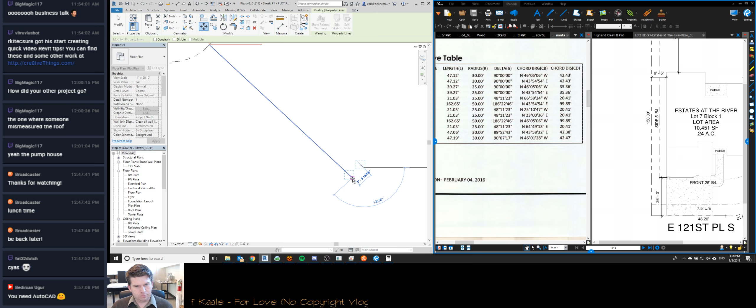No, AutoCAD is the last thing I need. That's what was missing right there.

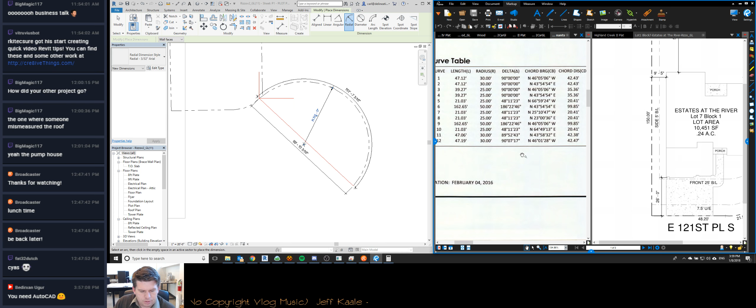So the question is, one of these is incorrect. Either the chord distance or the length is incorrect.

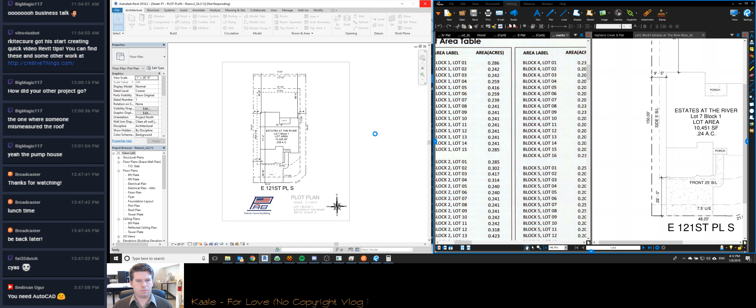So I just saw. I actually show the acres correctly. We just had it wrong before. Okay. And it's taking forever to open and save.

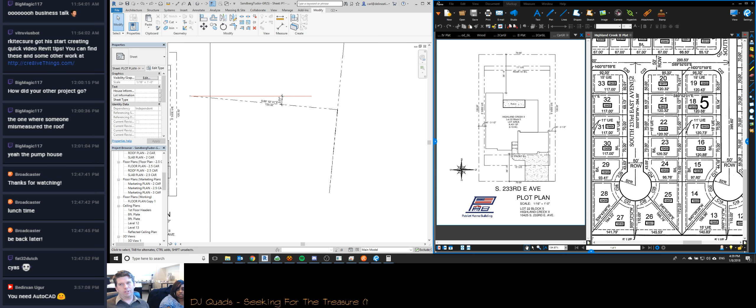Oh, you know. So there were a couple things that I wanted to go over that I noticed that you, I don't want to use the word struggling with, but some concepts that I felt you weren't quite grasping with view templates when we were doing the custom modifications. And then I want to go over the project versus True North. Okay. Mostly because what I found is, no offense, but I have to check. So, yeah. And in checking your work, it's hard for me to go in and draw these lines at these coordinates because True North is rotated. So I'm drawing them in at the coordinates, and then it's rotated not quite the way I expected it to.

So hopefully in the next 30 minutes, I'm going to kind of go over those couple things, and then what I want you to do is I want you to kind of go do an hour of, okay, let's see if we can grasp these concepts and do a couple things on a project or make up a project or something and see if you can reinforce what I'm going to show you, because I know when I sit over here and I'm the one clicking and typing and stuff like that, it's hard to actually reinforce it. So when I get done with this, I want you to go back and kind of just see if you can reinforce what I'm going over.

Okay. So the first thing I want to go over are view templates and how I use them and how I feel that they should be implemented in Revit. Not everybody uses them the same way, and how that affects the visibility graphics of one view versus many views. Okay, so one thing that I've noticed is that, especially, and I noticed it mostly in the design option projects, we have view templates that are assigned to views, and then we have view templates that we use to modify the visibility graphics of views. Okay, and what I noticed is that instead of using the view template to modify views, you're assigning it to a view or you're changing a view template, and what happens is that has a trickle-down effect on all the views in the project. So I want to give you a quick example.

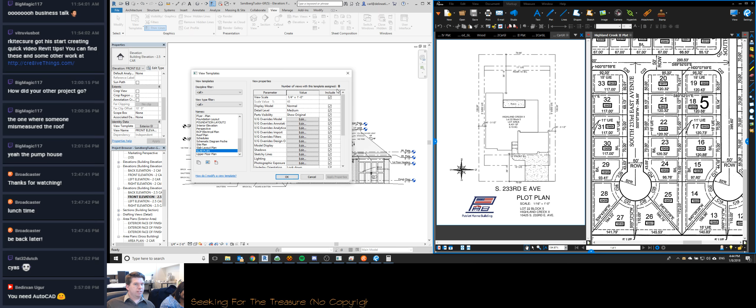So another good example, let's just go look at that site plan. So there's only one view with that assigned to it, and slab layout plan, there's 3 views, probably 2, 2.5, and 3 car. Garage slab plan, there's none assigned to that one. Okay, so if it has a view template assigned to it, just know that when you're in this dialog box changing things, it changes everything for all the views that that's assigned to.

Okay, now what we have set up is, I'm trying to think of a sheet where we just, okay, so for instance, the area plans. There's not a whole lot that we document in the area plans, so instead of making other views, it's quicker to just change the design option.

Okay, so one of the things that you can do using view templates is, and it's kind of weird with the terminology. If I select this, I can see that area analysis is the view template that is assigned to this view. However, if I go into this, and you know what these checkboxes mean, right? If I come down here to design options, it should be unchecked, but it's not. So I'm going to uncheck that for now, and hit OK.

Now I unchecked that, so which views did that affect? It affected all of the ones that view template is assigned to. So if I come to this one and go to area analysis, I can see that that's unchecked there. So I'm going to check it here, and then I'm going to come to this one, and it's checked. So that affects everything.

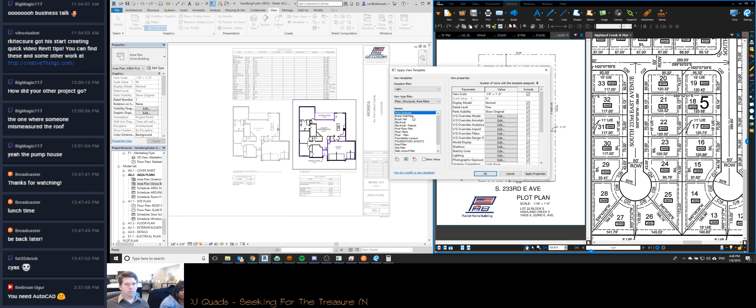All right, so the difference between assigning a view template and applying view template properties is that when I apply template properties to this, I'm only applying it to this one view. So it's not going to mess with the other views that the template is assigned to. I would have to go and do it to that one also.

And the same thing with schedules. I've seen this in some of your schedules too, where if you go into the properties, see this has a view template 3 car assigned to it. We don't want view templates assigned to schedules. But you can go in and let's say this schedule, area schedule here. I think that's the right one.

We can assign template properties 2.5 car. Oh no. 3 car. That should be, oh, it's not going to update it because we actually have to move this line. That's right. Oh, it's this one right here. So room finish schedule.

Go here. No view templates assigned. That's fine. So if I come here, apply template properties. Let's go 2.5 car. So that'll change to 2.5 car. Okay. I didn't change the view template. I just changed that property that I can update.

Now, in the view template itself, if this has a checkbox next to it, then when I apply view template properties, it won't change it if there's a checkbox in the view template that is assigned to the view. So essentially what we're doing here is if we have a view that has all these checkboxes, let's say that this is an area analysis view. I don't know if you can see that or not.

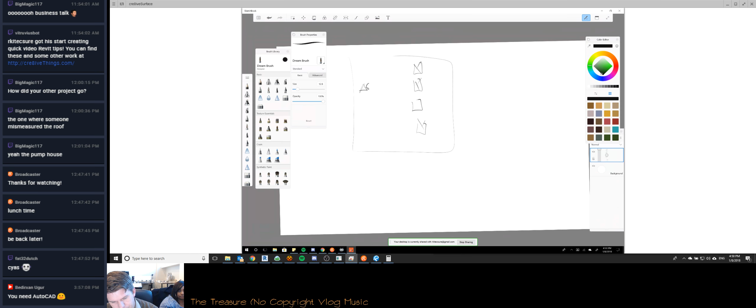Let's say this is area analysis. And we've got this view template that has all these properties that are locked in place with those check marks. If we come in and we say apply view template properties, what it's going to do is it's going to check to see which checkboxes in this view template are checked. I want to make sure I match the right number of boxes.

So if we come and we apply view template properties here, and we'll make this one red. No, we won't. There we go. The only ones that it's going to actually fill are the ones that are empty. So this is the only one that gets this property here. Everything else is already full, so we can't put anything in it. It's basically locking it, pinning it, making sure you can't change it.

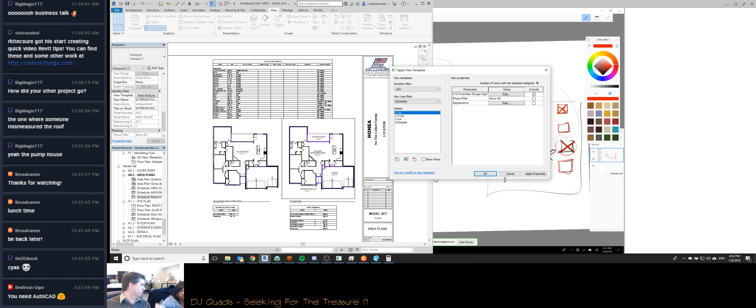So this is open, so the only thing that's going to come in when we do that assign or apply template properties is the VG overrides design options box, because it's checked. That's the only thing that's going to be able to come in if it's empty in the other one. So we're basically filling those gaps. Makes sense? Yeah, makes sense.

And then to confuse things even more, that's not to be confused with, see, if I'm just in visibility graphics, this is all grayed out. Why? Because nothing is selected, or is it? I'm in the view. Because it's none. It's not a template to apply to it, right? Opposite. I can't change anything because it's locked by the view template.

So if I go look at the view template for this, VG overrides model is checked, which means that everything that's set in the view template, I cannot change in the VG overrides model dialog box here. And that's the same for everything here because it's all checked. See, even the design options is checked.

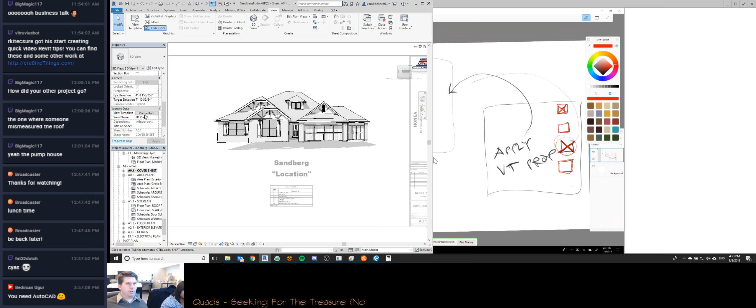So just to reinforce that real quick, I'm going to come here to perspectives. I'm going to uncheck VG overrides design options, visibility graphics. Uncheck that. Hit OK. And now I'm going to go to visibility graphics in this view. And now you can see that I can change that. It was locked before, but now it's open. Any questions about visibility graphics, view templates, applying view?

So the view templates that you apply, say it's locked, and you can go into the actual view, and you can uncheck it. Will that just apply to that one, or is it gonna change anything? Good question. So think about the context of what the command is. If I right click this and I say apply view templates, what am I applying view template properties to? Would it be the 3D view? Yeah, just that one view.

Now think about going into view templates, manage view templates, and then editing one of these view templates. What am I applying a change to here? Is it gonna be all of them? Yeah, because I'm changing the view template. So we've got the view template. It goes out to all these different views.

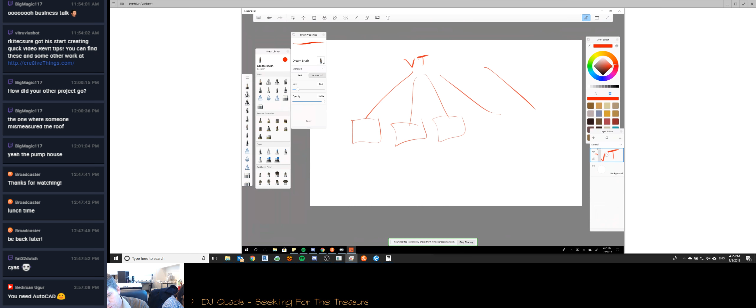So if I change a setting in the view template, what it's going to do is it's going to go change it in all the views that that view template is assigned to, so that they match.

Now let's say in these views, we have a property that is not set in the view template. It's unchecked in the view template. So in Revit, it's unchecked. That'll be what's blue here. That means that I can go to this view and I can change it to something completely else, because it's unchecked. And then I can go to this view and I can change it to something completely different.

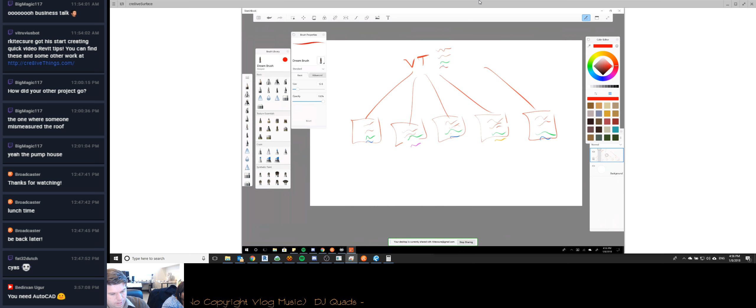I can even go into the view template and I can change it here, but if it's unchecked, it's not going to change anything in these other views. Now the second that I go in and I check that, that's when Revit goes, oh, okay, and it makes that change in all the views. Does that make sense? Yeah, it makes sense.

All right. Hey, we're doing good. That was only like 10 minutes.

Okay. So regarding true versus project orientation. Okay. So what is your understanding of, what am I trying to say? Project orientation, Project North versus True North. What's your understanding of that?

My understanding is when you're in Revit, when you apply the True North, then it's going to be rotated, or it's going to be the actual site. But if you put it to, what's the other one? Project North, yeah. Wait, maybe that's the opposite. Well, just keep going. Keep going through your thought process, and then we'll correct it.

Project North is the actual. I mean, it's gonna be 90 degrees or however you see it in Revit. Right. Okay. You're correct. So what happens is inevitably, the world is round, and like Tulsa downtown's on a grid, right? So everything in downtown Tulsa, all the properties look like this, right? Or something like this, right?

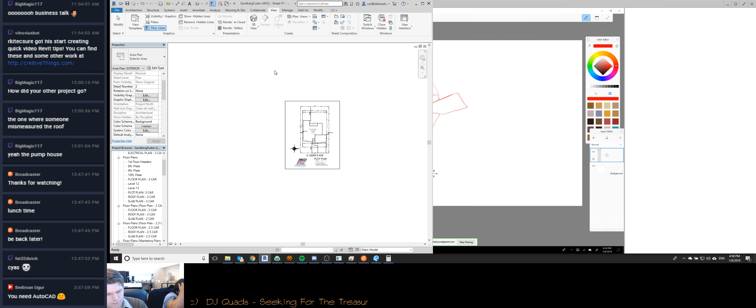So what happens is you get something like this that you're trying to fit on a sheet like this, and because it's rotated, it doesn't fit. But as soon as you rotate it to be orthogonal to the sheet, it works, okay? So let's say that your True North, okay, you've got some properties that look like this, right?

True North is this way because that's magnetic north. Well, in our case, it's going to be the way that the compass needle points is north, okay? Because we live in Tulsa and not the North Pole, we don't have to worry about what magnetic north actually is for the purposes of this, okay? So let's say we want to put this property right here on a sheet like this. I'm going to go ahead and make 2 sheets, all right?

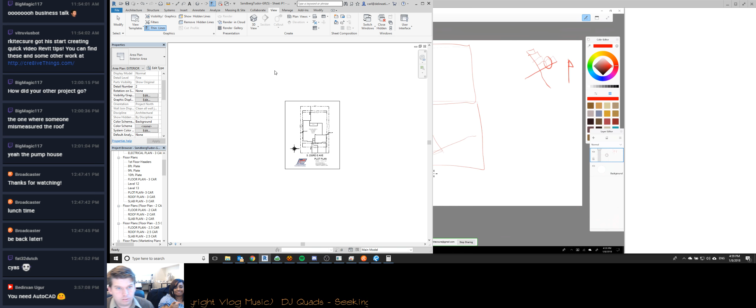So if we wanted to do a proper site plan, we could do something like this. Yes, sorry. Okay, we could do something like this. Okay, to clean it up, we could rotate that just a little bit so that it's this. And True North is this way on this one. Okay, but what happens is that True North starts pointing that way. Okay, this would be True North, and this would be Project North.

For our Patriot home building projects, all of our Project North has the entrance on the south, plan south. Okay, so in this case, this is plan north, plan south, plan east, plan west. And this is a good system to use if you're talking to somebody about a project that's rotated. If it's rotated extreme, where you start talking about it and it's like the north side of the project, and somebody's like, oh, time out, north what?

Right? Because you're looking at the top of the plan, but north might actually be like somewhere over here. Because it's a long project, and then we had to rotate it to fit on the sheet or something. So you can say plan north, plan south. Now, if you're looking at the site plan and you're talking about civil components, there's a tree on the northeast of the project. That's when you want to start using the True North orientation stuff.

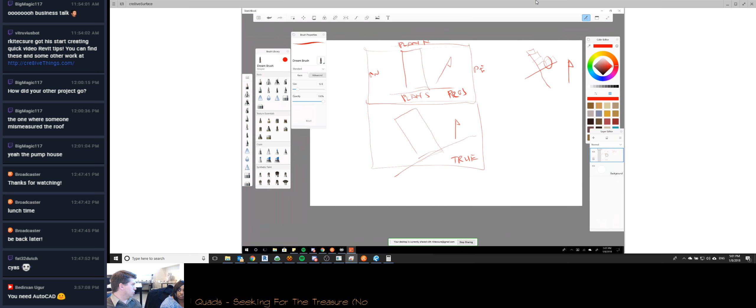Okay, so with that in mind, the easiest way to reproduce these Patriot home building projects is to make sure that south is always down. Especially in project orientation. And I think what I'm experiencing here is a product of the way I showed you how to do these. I showed you how to do True North and then rotate and all that stuff.

And I think the easiest way to do this is going to be to leave True and Project North just straight up and down, and go in and sketch the property lines and then rotate them to be parallel with the house. I think that's going to be the easiest way to do it. Now with a custom home, it's a little bit different because we don't have to worry about reproducing it over and over again.

So what I want to show you real quick is how to recenter this project so that when we sketch future property lines, it comes in at 0 is straight across and 90 is straight up and down. Okay. All right. So what we're going to do real quick is under massing and site. Knew it was in there somewhere. Nope. Manage. All right. So I want to be sure I'm in project north. Undo. Okay.

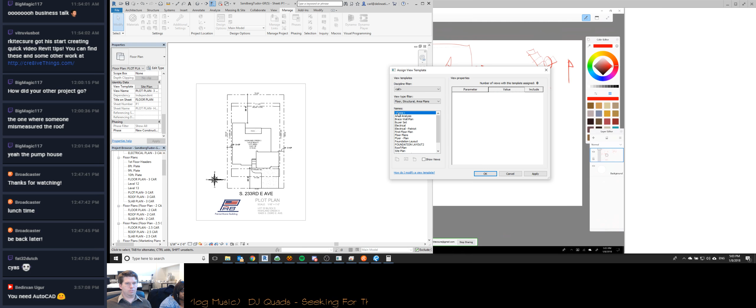So we're not in a view template, so I can set this to, and actually I'm going to go ahead and set true north. So we had rotated true north maybe from a previous project or something, I'm not sure. But I want to go ahead and rotate true north, and I want this to be straight up and down. Right. So we're good with that. And then we're going to make this project north.

Right, it looks like it's already. Project north is a little bit more limited because you can only rotate it in 90 degree or 180 degree increments, or you just select the line and it says, well, this is the one that I want to be north south.

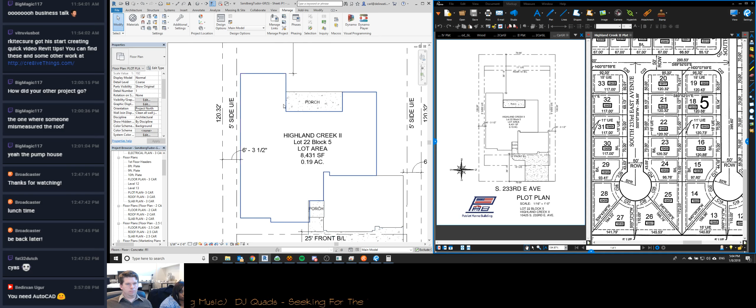It looked like it did have to rotate a couple things there. So what I can do now is I can double check and come in and enter these distances.

We're just going to say 120.32. We're going to say that's north. Have you figured out these coordinate systems yet? Not really.

They can be a little complicated. Takes some time because you see me sitting here trying to figure out which way I'm going. Takes a little bit. So this one's going to be going 70 south. Is that right?

Well, let's find out. 0759 east. That doesn't seem right, but we'll see what happens. 120.32. 120.32, gonna be south. 89.5203 west.

Insert 70, north. 0759 west. I don't think this is completely going to work out the way I want it to. Yeah.

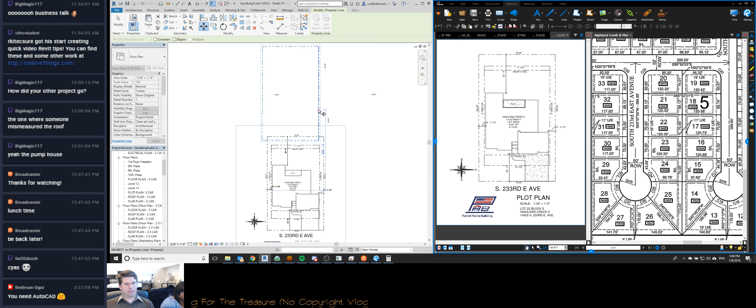I'm going to ignore the numbers right now because at the end of the day we're just going to turn these off and just have the distances. So what I'm going to do is come in and make this parallel by aligning that right there, and then move it to whatever dimension it needs to be from one side or the other.

So what I'd like for you to do is go through the traces, because those are really rotated for some reason. See if you can recenter those to True North and Project North, and also see if you can fix the site plan, because it looked like it was rotated just a little. See if you can get it to where it's straight again, because the floor plan's rotated just a little bit. Everything's rotated just a little, I think, from the Project and True North rotations that were happening.

Now, let me ask before I accuse. No, I'm not accusing you, but were you trying to get the property lines to rotate using the True North and Project North? Yes. Okay, not a big deal. It's not very difficult to mess those up. It's not a system that a lot of people use or understand, so don't worry about it.

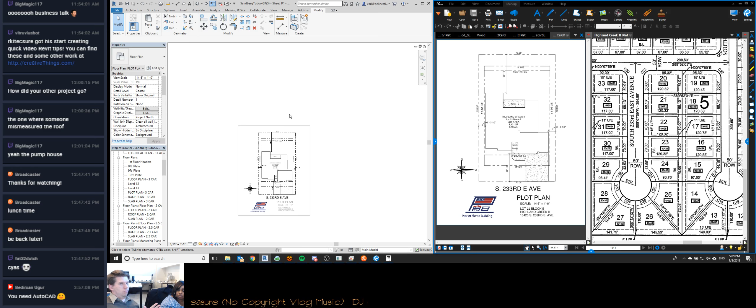But I think a good way to help you understand more is to try to get it back to where it was. You'll see when you open the model, if you go to the floor plan and the slab plan, everything looks just a little bit off. We need to see if we can try to fix that. Okay? Any questions?

With the... where did you go again with the True Project? How to get them back? True North. It was in the ribbon. Yeah, I can't remember where you went.

So you have to have the view oriented to which one you want to change. If you're in Project North and you try to rotate True North, it won't let you. If you're in True North and you try to rotate Project North, it won't let you. So if you want to mess with Project North, you have to be in Project North orientation, same with True North. And then I think it's under Manage, Position, and rotate True North and rotate Project North are under there.

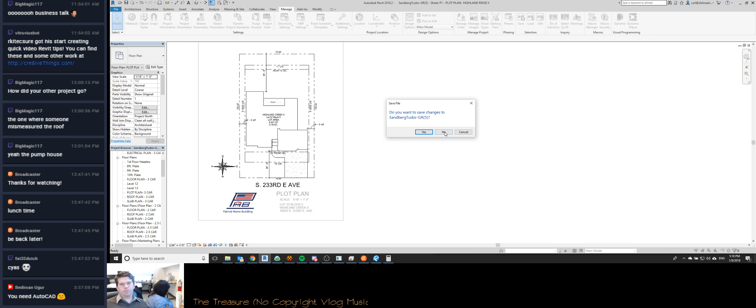All right, all right, all right. Thank you, I'm going to head out for the day. Yeah, feel free to stay and just lock up when you're done. There's nothing to turn off downstairs, so you should just be able to walk out. Okay, all right.